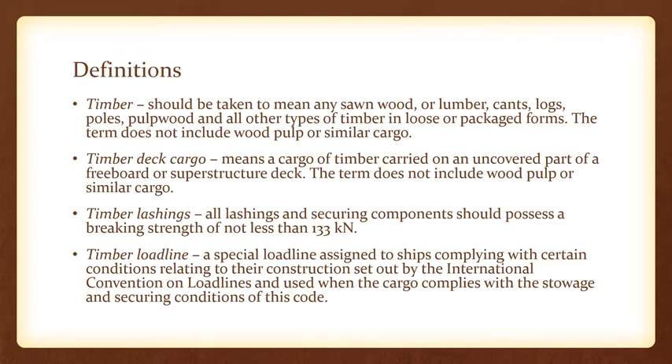Timber lashings include all lashings and securing components which possess a breaking strength of not less than 133 kilonewtons. Timber load line is a special load line assigned to ships complying with certain conditions relating to their construction set out by the International Convention on Load Lines and used when the cargo complies with the stowage and securing conditions of the code. Wood pulp and similar substances are not included in the timber terminology as stated before.

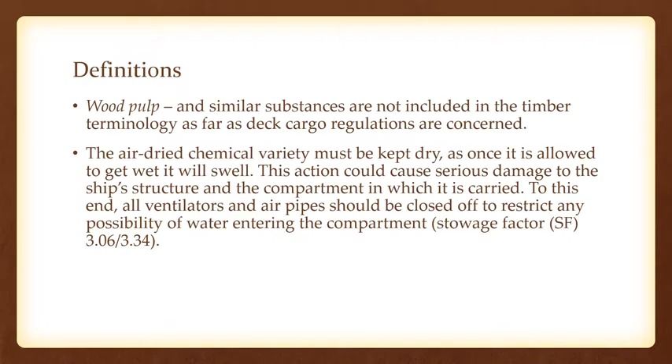And as far as deck cargo regulations are concerned, the air-dried chemical variety must be kept dry, as once it is allowed to get wet, it will start to swell up. This action could cause serious damage to the ship's structure and the compartment in which it is carried. To this end, all ventilators and air pipes should be closed off to restrict any ingress of water in the compartment in which the air-dried chemical of timber is loaded.

The timber is loaded in various forms with differing weights and methods being employed. For example, packaged timber is generally handled with rope slings, as I'll show you in a picture later on, while the heavier logs, depending on size, are slung with wire snotters or chain slings. Then there are types known as battens. Battens are basically sawn timber more than 10 centimeters thick and approximately 15 to 18 centimeters wide, usually shipped in standardized bundles and may be pre-slung for ease of handling, especially loading and discharging using either the ship's crane or the shore crane.

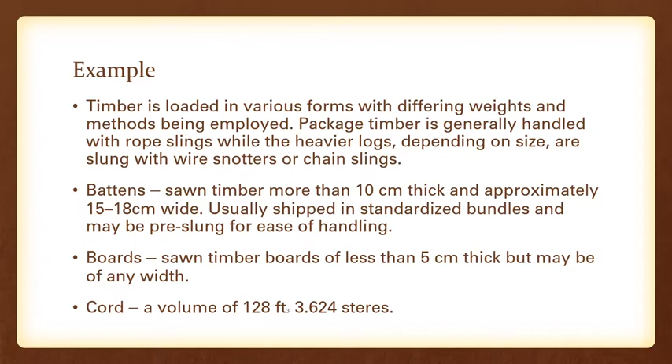Then there are boards, which are sawn timber boards of less than 5 centimeters thickness but may be of any width. Then we have a cord, which is a timber with a volume of 128 cubic feet or 3.624 steres. I'll tell you what steres are later on. Deals are sawn timber of not less than 5 centimeters thickness and up to about 25 centimeters in width. A standard deal is a single piece of timber measuring length, breadth and width of 1.83, 0.08 and 0.28 meters.

Fathom as a timber measure. Here the fathom is a timber measure. You can also have fathoms in terms of depth measurement, but here fathom as a timber measure equals 216 cubic feet. Logs are large and heavy pieces of timber, hewn or sawn, and may also be referred to as balks. They are stowed above and below decks, and individual logs may need to be considered as heavy lift cargo for the safe working load of the cargo handling gear being used.

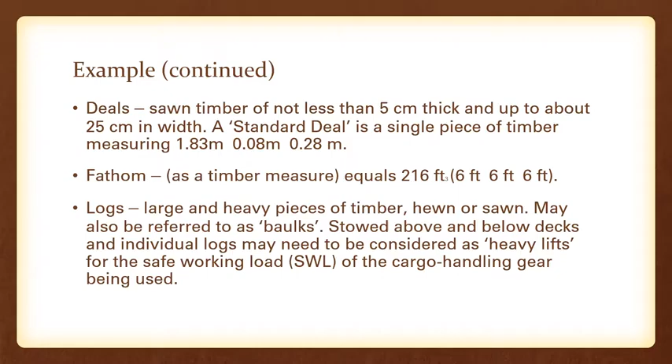So this is especially important if you guys are loading timber using your ship's own gear or ship's own crane. In that case, it is important that you make a note of these, that the logs then become heavy lift cargo, the lifting of which can actually list a ship. All right. Pit props are short straight lengths of timber stripped of bark and used for shoring up the ceilings of mines. They are shipped in a variety of sizes.

Then we have stack, which is a measure of timber equal to half a fathom as described before. That is equal to 108 cubic feet. Then there is a metric unit of timber that I discussed earlier, that is known as a stere, and is equal to 1 cubic meter or 35.314 cubic feet.

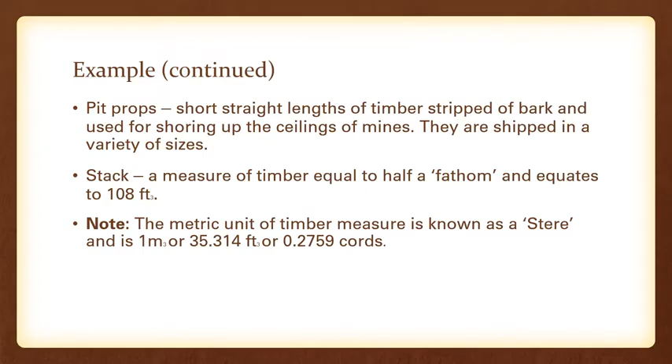Timber is generally shipped as logs, pit props or sawn packaged timber. The high stowage factor of timber generally indicates that a ship whose holds are full with the forestry products will not be down to her marks. So it will look like the ship is full of the cargo and the ship may be loaded heavily because of the high stowage factor, although it may not have reached its load line for that zone.

For this reason, an additional heavy cargo like iron ore or bulk ore is often loaded alongside the timber cargo. Or the more common method is to split the timber cargo to positions both below and above decks. So they are loaded both below and above decks. However, where timber forms part of the deck loading, some thought has to be given to route planning to provide good weather. By good weather, we mean a route free of rain if possible.

So prudent selection of a correct route could avoid prevailing bad weather and unnecessary concerns with the cargo absorbing seawater. As the cargo starts to absorb seawater, what happens? The cargo starts to become heavier. The overall center of gravity of the ship gets affected, and again the overall GM also gets affected with a reduced positive stability. So all the complications are linked. Now you have to start thinking like that as you start preparing for examinations.

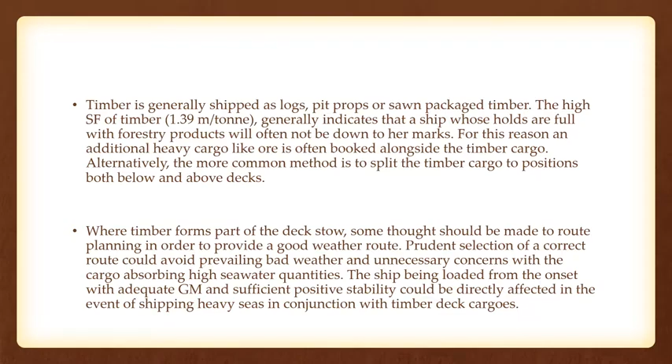Now regulations for the stowage of timber emphasize that timber deck cargoes should be compactly stowed, stowed tightly and secured by a series of overall lashings of adequate strength. Where uprights are envisaged as part of the securing, these uprights, which are vertical stanchions, should not be more than 3 meters apart. The maximum height of the timber stowed above the uppermost deck must not exceed 1/3 of the ship's breadth when the vessel is navigating inside a seasonal winter zone. I'll show you some of the examples of the lashings that are used in timber deck cargo very soon.

So additional regulations apply if and when timber load lines are being used. That is when the vessel is being loaded beyond the appropriate normal marks. These regulations take account of timber being stowed solidly in wells at least to the height of the forecastle deck. If there is no superstructure on your ship at the after end of the vessel, the timber must be stowed to at least the height of the forecastle deck. This stow must extend to at least the after end of the aftmost hatchway.

A further consideration is that securing lashings should not be less than 19 mm close link chain or flexible wire rope of equal strength. These lashings shall be independent of each other and spaced not more than 3 meters apart. Such lashings will be fitted with slip hooks and stretching screws that must be accessible at all times. Make a note that wire rope lashings must be fitted with a short length of long link chain to permit the length to be adjusted as well as regulated.

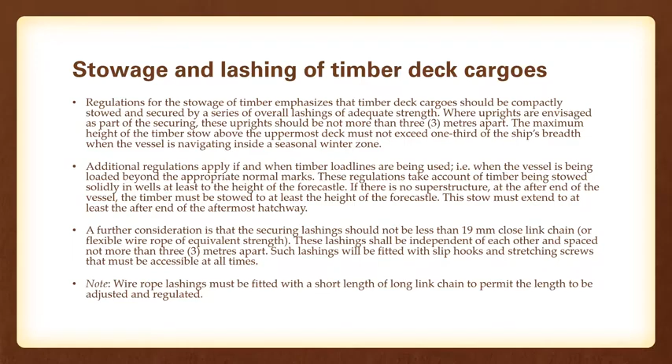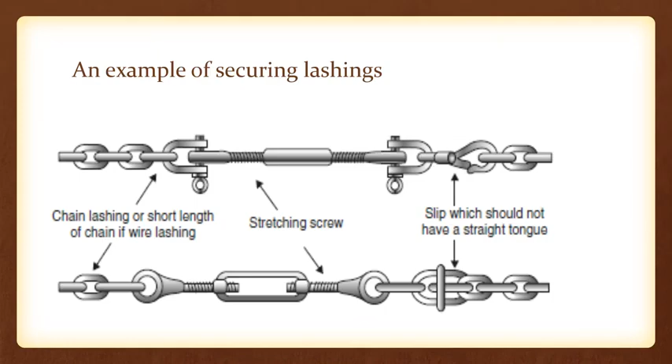Here is an example of securing lashings. You may again pause the video here for some time and draw these lashings. So even if you draw these lashings and write a little bit about the lashing, remember some of the spacing, especially of the uprights, that should be good enough, right? Hopefully no one will expect you to remember each and every tiny detail, but you can draw these lashings and mention something about the spacing of the lashings if you are asked about lashings.

However, let's go on and talk about lashing points. So the lashings over timber cargoes are secured to eye plates attached to the sheer strake or deck stringer plate at intervals not exceeding 3 meters apart. So if you have been sailing on cargo ships, you should be able to imagine what a deck stringer plate looks like. Those are strong plates, one of the strongest points of the ship, and they are used for lashing. They have holes in them through which you can pass the lashings, and they are very strong plates, not easily damaged or under stress.

The end securing point is to be not more than 2 meters from a superstructure bulkhead, but if there is no bulkhead, then the eye plates and lashings are to be provided at 0.6 meters and 1.5 meters from the ends of the timber deck stowage position. If the timber is in lengths of less than 3.6 meters, the spacing of the lashings is to be reduced.

Access to parts of the vessel fore and aft must be possible, and when a capacity deck cargo is carried, a walkway over the cargo is generally constructed. So if you don't know what capacity deck cargo means, it's cargo loaded to the full on the deck, but still a walkway should be provided. You cannot have a ship sailing without the walkway if at full capacity.

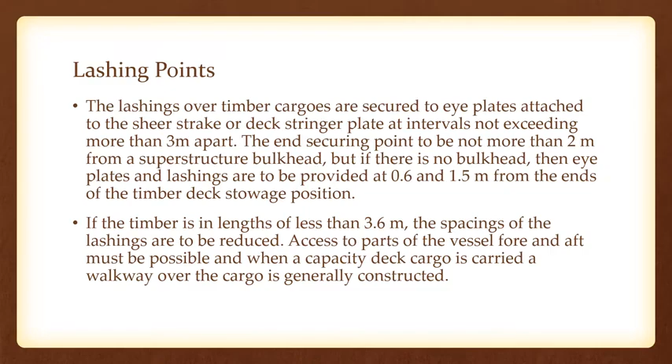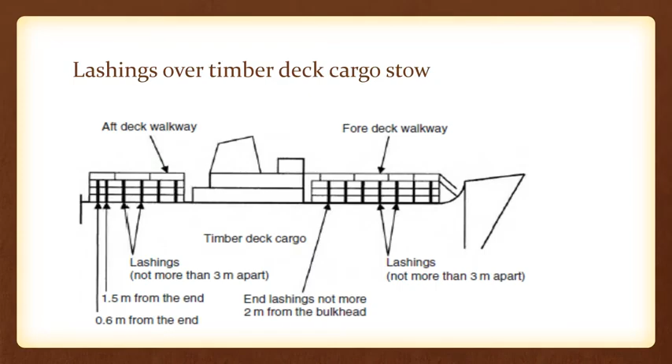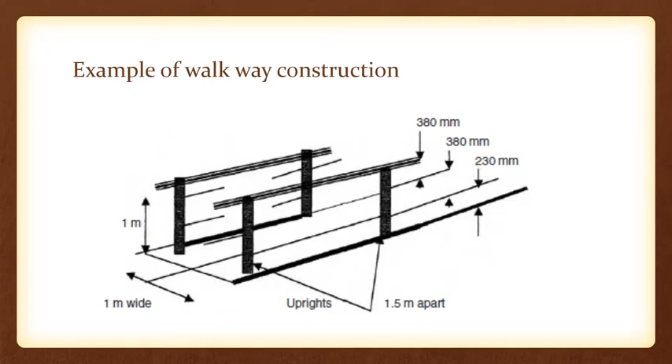Here is an example of a walkway construction. This walkway is constructed sometimes over the timber deck cargo, especially if it is loaded to the full. This allows the crew to walk on it for monitoring of lashings and carrying out any tightening of lashings.

The Code of Safe Practice for Ships Carrying Timber Deck Cargoes, or what is known as the Timber Code, provides the general guidelines for the under-deck stowage of logs when they are loaded under the deck in the hatches. Prior to loading logs below decks, the compartment should be clean and hold bilges and lighting tested.

A pre-stow loading plan should be prepared considering the length of the compartment and the various lengths of the logs to be loaded. Otherwise, if you are trying to load logs which are longer than the compartment length, you can understand that there will be damage to the compartment or the cargo hold, and that is something that you don't want. Recommendations are that logs should be stowed in the fore and aft direction in a compact manner.

When loading, they should not be in a swinging motion, and any swing should be stopped prior to lowering into the hatch. Like I said before, because these logs are so heavy, they can cause heavy damage if the vessel does not control the swinging of the log.

The heaviest log should be loaded first, because why? Can you tell me why? Think about it from a stability point of view. Alright, the heaviest logs go down, so the center of gravity also shifts in that direction. The heaviest logs should be loaded first, and extreme pyramiding should be avoided. So loading the logs in a pyramid shape should be avoided as much as possible.

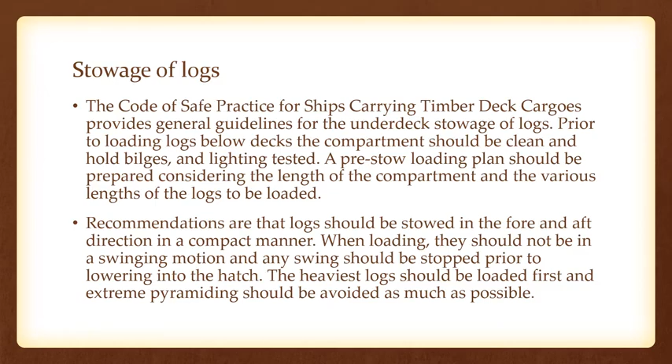I have a couple of diagrams or pictures here to show you how the packaged timber is loaded on a ship. We talked about the packaged timber in the initial part of the video. Packaged timber will usually be banded and may be pre-slung. Packages may not have standard dimensions and may have different lengths within the package, making compact stowage very difficult.

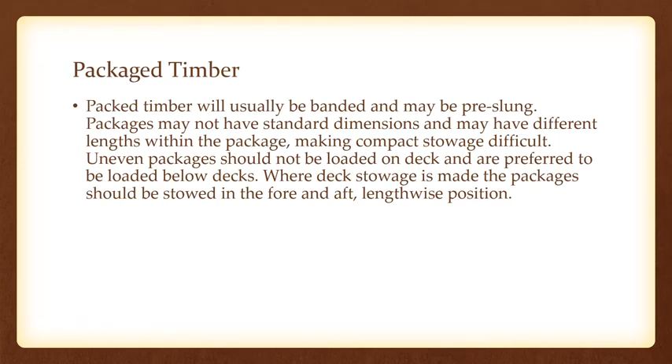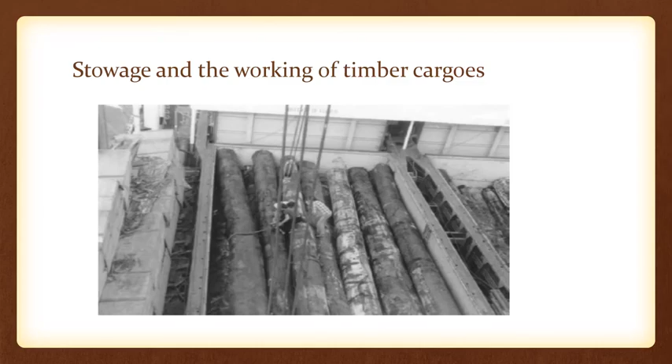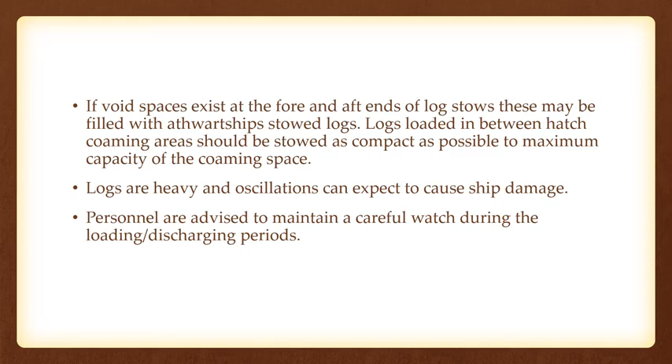If void spaces exist at the fore and aft ends of the log stows, these may be filled with athwartship stowed logs, as I showed you in the picture before. Logs loaded in between hatch coaming areas should be stowed as compactly as possible to the maximum capacity of the coaming space. Logs are heavy and oscillations can be expected to cause ship damage. Personnel are advised to maintain a careful watch during the loading and discharging periods.